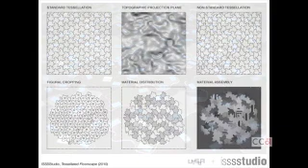So the idea was that every time you would water jet cut a rug, you could extract a different pattern, which was constrained by the surface onto which it was projected.

There are a couple of problems with it, and you kind of see here that this was like the Industrial Designer Society of America show. This was Flux Factory - these were participatory workshops that an artist was doing. I think they had no idea that the carpet was actually an installation. I think they just thought it came with the office that this thing was in.

It came back so filthy from this one, but we clean it with this corn husk powder. And then here it was used as part of a video set by a New York artist.

And then it was also a design within reach. I think its final home is actually quite nice. It's much nicer than where I live.

This is a house in Austin by Bercy Chen, and this is its permanent home. This is also a really amazing house with an amazing, enormous green roof. And this picture actually comes out of, I think, this month's issue of Dwell's Houses We Love. So I'm very happy with the destiny of this piece.

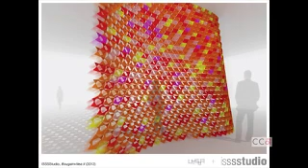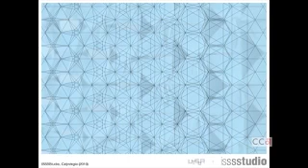But one of the things I moved away from in the first prototype to this prototype was that I was trying to make edge-to-edge connections between the components so that the porosity could be dealt with better. And that worked in some way.

You see that the components are differentiated, but then another thing happened because there's gravity. So when you install something vertically, the geometry of the components actually revealed another set of apertures that, in the digital realm, when they were just templates for cutting, were next to each other. But of course, when they drape, we discovered this kind of inversely dependent or proportional set of apertures.

So it's like I would have never thought to necessarily model this, but it just kind of emerged as actually a very obvious rule of that particular system.

And then what I was doing is trying to capture some of that information. So rather than remodeling the thing that was already made and already existed, I was modeling the findings - the edges and the apertures.

And that actually became the system for this competition, which is the Solar Floral project. So in a way, this ended up being kind of a form-finding model, for lack of a better term, just applied at a different scale.

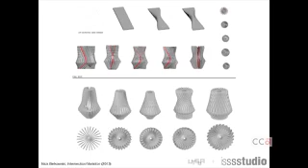The second project—actually Nick Kinnaird is here, he was my student at UT last spring—he and Megna looked at a definition that considered the role of resolution of curvature, so the number of control points, and the creation of asymmetries along with this kind of radial arrangement. Then, very obsessively, they not only looked at the formal variation but used different 3D printers to output the prototypes, CNC routed, laser cut. So they really made a catalog for themselves of what this could be and whether there was any material feedback that was relevant.

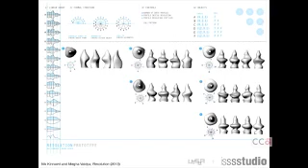There are lots of things, actually Nick can tell you, that didn't make it in—there was chocolate, there were some really messy ones—but this is really what they ended up with, which was quite good. And then also some of the accidents that happen along the way, like what happens when there's a glitch in 3D printing, and you start getting these slices, which are actually not something they meant to do, but then they discovered that as a technique for exploiting this formal vocabulary further.

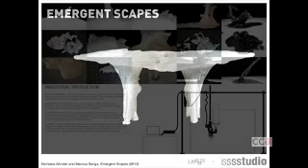So there is that. Then a very different kind of project that was driven by material. It's getting late, I'll speed up. Which was wax, using water as formwork. And this was actually a project that was prototyped at the AA that they wanted to take further. And so they kind of simulated this process of having an iterative process with the material that would result. So the variation was based on materials.

And they really worked very hard to figure out how to make wax more permanent of a material by adding different dusts to it, but also thinking the bigger picture and looking at the petroleum industry, thinking of wax as a kind of industrial byproduct. So they were also thinking about what this might mean regionally, politically, or economically. So they imagined that this project could actually be a pilot project somewhere in Louisiana, probably in New Orleans, that could plug itself into the regional industry that actually produces wax as a petroleum byproduct.

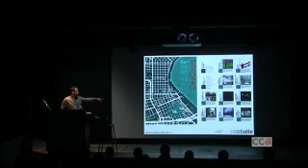So our project is the 10th one. So of course you see that the first 9 are all clustered together, and then the 10th one, they had to make the map bigger to include ours. But the trade-off was that our project was in a much cooler part of town than everybody else's. So that was good. It was in the Marigny at the end of a dark alley.

The biggest piece was about 2 feet by 9 feet or something like that, and there were 12 of them. This was a super exciting project.

Matt just set up his metal shop, and I wanted to cast these things bigger. We never really saw each other throughout the whole process, but we managed to work with pretty close tolerances. Matt did all the steel fabrication in San Francisco, and I did all the rubber fabrication in Austin.

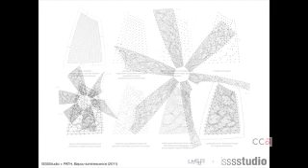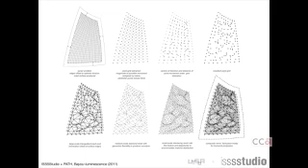Within that, there's a logic to the pattern within the panel, but that is also customized to begin to deal with variations in density, texture, and all the things that would be broadcast by light at night. And this is really where it all came together, and it lived on Dropbox.

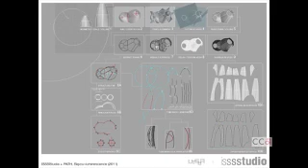We wouldn't have been able to do this even 10 years ago, not because we wouldn't have been able to model it or figure it out, but because there was no Dropbox. And then this, you see the shallow relief formwork on the right.

By the way, we decided that we would make this piece on October 15th, and the installation opened December 1st. So it was kind of a crazy time, but also one of my favorite periods of time in recent memory.

On the left was actually the first success of releasing the skin from the mold, and then you just see one of the 12 panels that were used for the shallow relief formwork, and then these are two scenes from Matt's shop.

You see the armature, and then you see Matt's meticulous craft on the right. A view from above.

Some of the details. One of the confessions, and this is something that both Matt and I really didn't like, is that originally the tabs that connect the rubber pieces to the bottom ring were designed so that they could be pierced, sort of like an ear, with the hooks that were welded onto the ring.

But we got really nervous about it, because if it had started snapping kind of systematically, we would have lost the piece. So we used zip ties there, which we didn't like very much, but it's true.

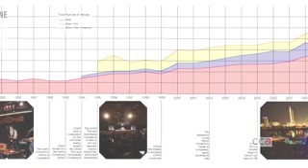So they made a book, and I just told them to find out everything. Then the second part of the research was to figure out how they could start with 5 recent design innovations in the air right now: full-scale 3D printing, robotic assemblies, smart materials, pollutant neutralizing finishes, and a 5th one I can't remember right now.

What was the 5th one? A really important one.

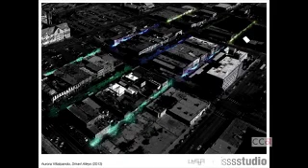The students really had to rethink both site and program. They had to rethink what a site would be for an event like this, but also what a program is for an installation if it's not the kind of program we think of conventionally, because really the program for most of these installations is showcasing the innovation.

If South by Southwest can be the launching pad for everything from electric cars to new energy drinks, why can't it also be an event where the public comes into contact and experiences some of the innovations that we're dealing with in the design industry?

So this project is dealing with smart materials, and it's looking at piezoelectricity.

For this student, the site strategy was to capture 6th Street, which is kind of like the Bourbon Street of Austin—that's the middle road that you see—as a way of activating the alleys that are underpopulated and run parallel to it.

So then it became this temporary infrastructural move to release some of the traffic from 6th Street and redistribute it into the alleys, and then for the piezoelectric material to generate power to illuminate and service the alleys. You kind of see that here.

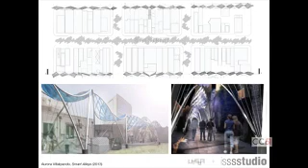I'll go through these things pretty quickly, or else I don't think we're going to eat dinner. Then this is the other project looking at 3D printing at full scale and what that means in terms of programming it as an event.

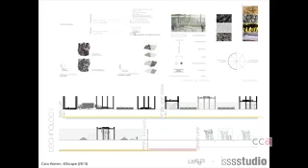It takes into account the slowness of 3D printing as an experience, and then also what it means to deal with the mass after the event.

We're getting to the last bits and pieces here. The second advanced studio at the same level was the Art Fair studio, and the idea here was to look at another kind of temporary urban phenomenon—art fairs—where thousands and thousands of square feet are temporarily transformed. So why aren't interior designers doing that too?

It's like event planners. So we worked with the Texas Contemporary Art Fair and the George Brown Convention Center in Houston. The site was 135,000 square feet, and the event is up for 3 days.

Really looking at prefabrication strategies, and also how some of these pattern-based strategies could be scaled up so they could work at the scale of spatial organization rather than surface or ornament.

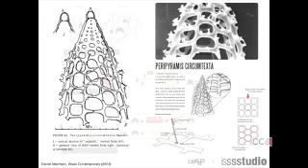Patterns were generated differently. Here it's a simple insight about the overlay of two patterns within a single system—a shifted grid and a hex pattern—and how the organization of front of house and back of house becomes a sectional rather than a plan-based organization. Just look at some of these.

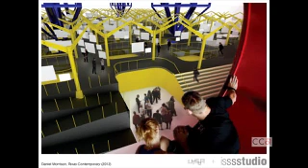The other thing about the site itself is that you enter it from the concourse above, so the first thing you see of any art, of anything happening at the convention center, is from the aerial perspective. So it was actually the perfect site to deal with in terms of pattern and organization.

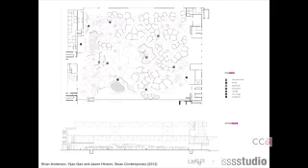I'll quickly show this other project that looked at another set of patterns, dealing with the existing distribution of services within the space, and how it gets modified by this overlaid organization. The magenta is an inflatable system that's both a canopy and flattened to include things like lighting, plugged into the regular service grid of the convention center.

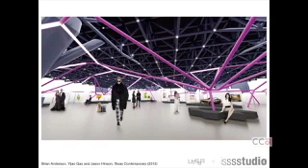For one, it has to do with this hangover from working on component-based projects where everything is additive—you start small and hope you'll end up big in the end. For this particular project, we also weren't sure because we weren't making the thing itself. We had no idea what was possible.

So our only control was really in the printing process, because we were working with a fabricator that only makes standard art fair booths. We had to work with them, and the project was in New York. The art fair company is in Chicago, and their shops were in Michigan. So everything had to be brought from Michigan to New York, and this was up for a week.

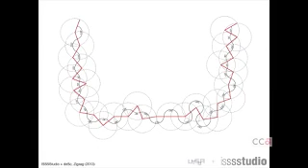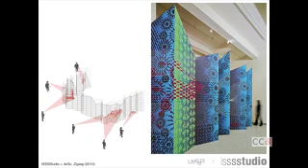You see the piece here. There was one more layer, the red, which is the anamorphic layer—like the 16th century painting of the skull with the anamorphic view. So what we did was take content from the art fair and project it onto the surface of the installation, so that from certain points of view you'd get these aligned figures. You have Corey Beeg as our scale figure.

The last part of the installation was the virtual shadow that the piece casts. We had the flooring, which becomes the entry sequence from the front of the pavilion over there into the art fair.

And so with a kind of a synthetic light source that defines what the outline of the shadow is.

This is a project that I'll end with that just opened on Friday. It's an installation I did as a participatory workshop with students in Austin, taking the tradition of textiles and printing, thinking about block printing but also digital printing. This piece is 10 feet in width and 15 feet in height.

The premise is pretty simple. We came up with a way to generate a series of floral templates that don't repeat, based on 4 different rules: the number of sides in the polygon, the type of petal, the scale, and the order of lofting.

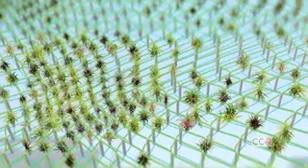So just very quickly, in closing, a couple of projects happening right now. This one takes some of these installation strategies and works with living matter. It's a competition I just finished with Tammy Glass and Kendra Ordia.

It was actually a project we dreamt up last time I saw Amy at a conference. We're working on it and working towards prototyping it. There are some glitches because it turns out plants are a lot more difficult than we thought—so we can fabricate it, but I don't know that we can keep it alive.

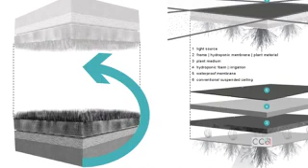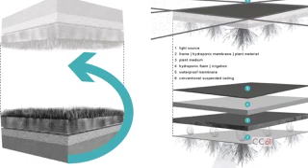There's another project I'm working on right now with Mark Simmons, who's the head researcher at the Wildflower Center, a nonprofit affiliated with UT that deals with the preservation of native landscape in central Texas and native species. He's been working on developing sustainable products like grass blends, and dealing with unusual applications of native species.